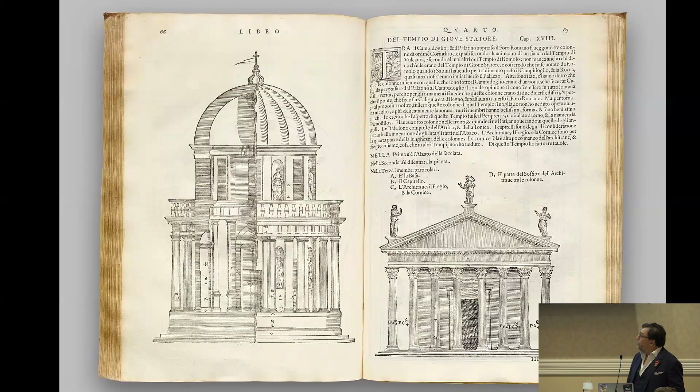But it's worth just remembering that Palladio's Quattro Libri was only one year old when that battle took place. And Michelangelo's magnificent dome of St. Peter's was as yet incomplete when that enormous military catastrophe took place.

So in a sense, do we look at Palladio and Michelangelo and look for their reflections of the cataclysmic civil strife that was going on in the Italian Renaissance? I don't think we do, really. I think their pursuit of beauty and their pursuit of the nobility and universality of the classical tradition continued despite the civil chaos and military strife that existed in this period.

Other significant moments in the past, such as the French Revolution, I think everybody knows what kind of situation that was, and it still generated some magnificent buildings after that revolution, despite the enormous loss and terror and chaos of the events. And in Russia, churches were destroyed after the Russian Revolution in 1917, and Bolshevik soldiers would just ravage the churches and take everything away.

So there's just a lot of chaos and uncertainty and confusion in history, but I don't think architecture is necessarily there to reflect on that.

Even today we see these cataclysmic events in the world where large groups of people are made homeless by conflict, and entire towns are just routinely destroyed. And also churches in Syria are now famously being destroyed one after the other. So there's a lot of chaos and confusion and uncertainty in the world, but where does that really leave us?

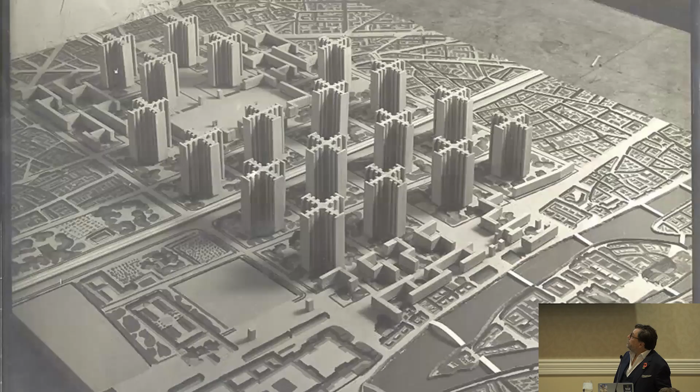But that's not new. All of this began much earlier, more than 100 years ago. And this was Corbusier's plan for the destruction of the center of Paris and the rebuilding of these enormous towers. That was a very serious plan of Le Corbusier.

So the historic environment's always been under threat. And you can see the amount of effort Corbusier put into these drawings. This wasn't just a Sunday afternoon sketch. This was a proposition to change the world.

And after the war, of course, in England, after the Blitz, much of London was destroyed. And you can see the new tower blocks of the future under construction. And this defined our urban environment for very many years to come, and it still does.

St. Paul's Cathedral stood out famously amongst the ruins of London during the aerial bombardment of 1941, and one could say that perhaps it had a worse effect after the war, when the modernist rebuilding of Paternoster Square took on a kind of Corbusian dimension. Thankfully, that's now gone, and everybody knows what it's been replaced by, which is great.

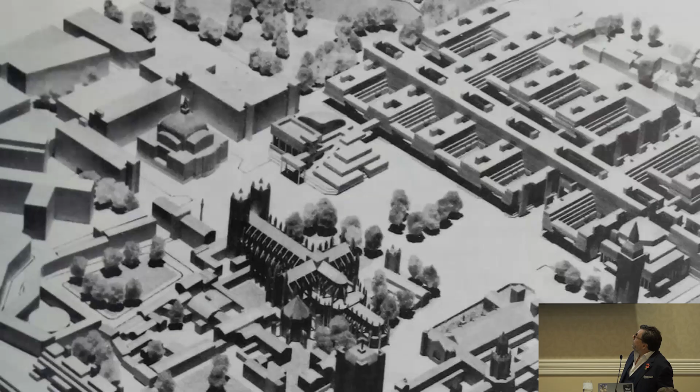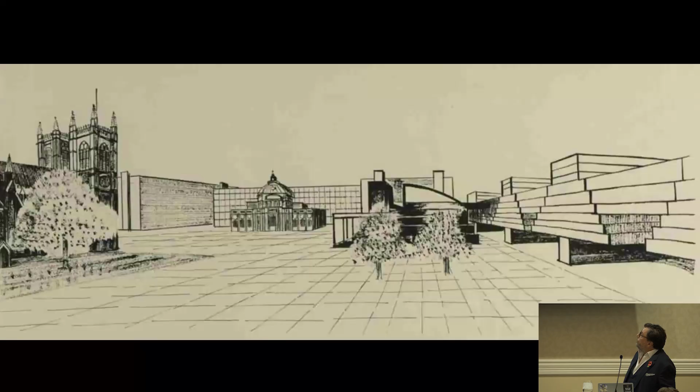So little by little, some of these things are being called into question. This is Parliament Square, and the building on the right is a monstrous project by a very well-known architect at the time to destroy most of the Westminster quarter around Whitehall, and rebuild it with this, leaving the great ancient cathedral or the Abbey Church of St. Peter on the left there, floating in a gridded space with no context left at all. Thankfully, that didn't happen, and we're still left with this great route through Parliament, Westminster Abbey, and Whitehall. So thankfully, that project didn't go ahead.

But if you look up the transcripts of the discussions in Parliament at the time, the Minister of Public Buildings and Works thanked Professor Leslie Martin and Professor Buchanan for their imaginative proposals. And reading, every word that's uttered in Parliament for the last hundreds of years is actually fully annotated in Hansard, and I think some of the debates are highly rewarding to review. It's a great archive for finding out the discussions about the battles between the potential futures of London after the Second World War.

And just in case we all thought this was just an anomaly, this is Le Corbusier visiting the School of Architecture in Cambridge with later Sir Leslie Martin, knighted for his contribution to architecture in the few years before that project.

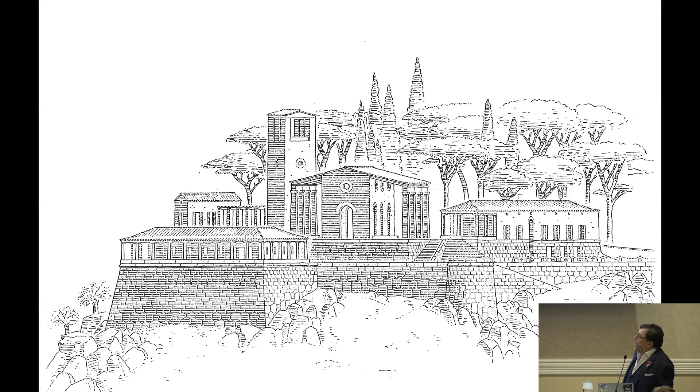I worked with him for a number of years, and we worked on this little villa in Corfu, and it's just a kind of refreshing thing to think about as a compositional device compared to all this worldly madness that we see around us all of the time. The genius of this composition is spectacular.

One could spend a whole lifetime studying it. It's a miraculous project, and I think these drawings are in the university archives, and I hope that there'll be an exhibition on Krier's work at some point, taking out some of this wonderful work, and perhaps Stefanos will invite me to assist with the curation of such an exhibition.

And of course, we know that Leon Krier's legacy is all about regaining that lost world of the beauty in architecture and having a consistency of skyline and a consistency of approach to architecture, which we're all in this room all struggling together towards achieving in our own different ways.

But Leon's world was based on a number of fundamental truths and beliefs in the world of beauty and what it constituted. And the idea that things had their proportional sensibility and that it was a part of the way that you make beauty was very much central to his philosophy, and it certainly is to mine.

All of those traditional things that we regard as beautiful are no longer embarrassing to a new, younger world where we are unapologetically pursuing that exquisite world of beauty that has been lost.

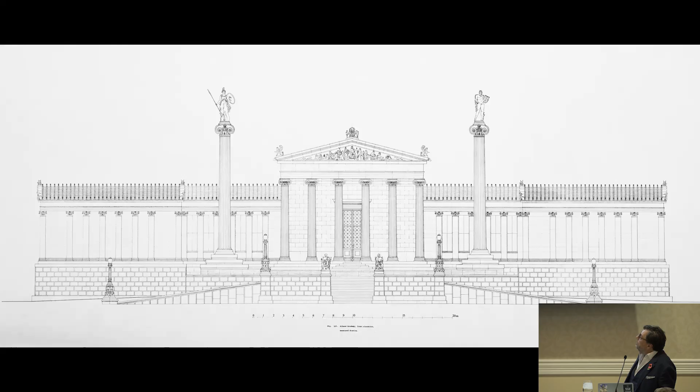That's one of the products of my 6 months measuring the Academy, and getting to grips with its beautiful detailing was a formative moment in my architectural education.

And how things are made. That exercise in Athens brought me very close to really looking, when you crawl around the roof space of buildings and see the slightly unfinished surfaces, you can see where people left their mark as if it was yesterday. And that was true. I had the happy experience of being able to clamber onto the top of the Parthenon and look at the unfinished bits that nobody ever saw. That fascinated me. You could actually begin to see how the building was made and reverse engineer how its whole construction took place. So measuring buildings is full of delightful surprises that lead you into delightful avenues of consideration.

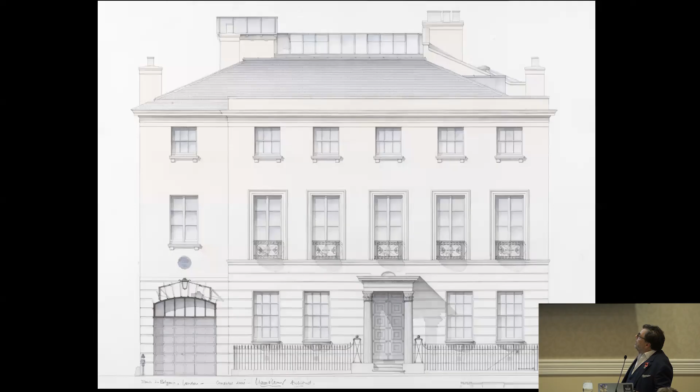And in this house that I designed in London, with its Tower of the Winds order, was an exercise in very much along the same lines. Everything was drawn by hand, full size. We needed over 1,000 drawings for that building, as many Notre Dame graduates who've been in the office while this was happening will attest to.

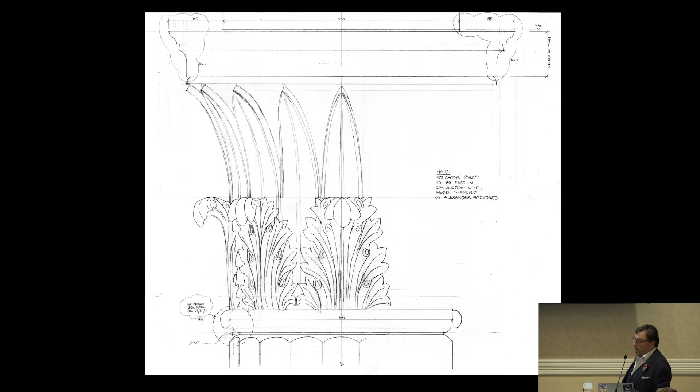So drawing it and supervising the construction, that's another aspect of something that deeply fascinates me, and I think it's a whole strand of expertise that architects have lost, and I think they need to regain that territory with both hands and with considerable gusto, because the joy of actually making something that you've designed and seeing it done with a certain kind of authenticity and physical power, with a lot of craft skill involved in the production of it all, is, in my view, an essential component of designing and building anything.

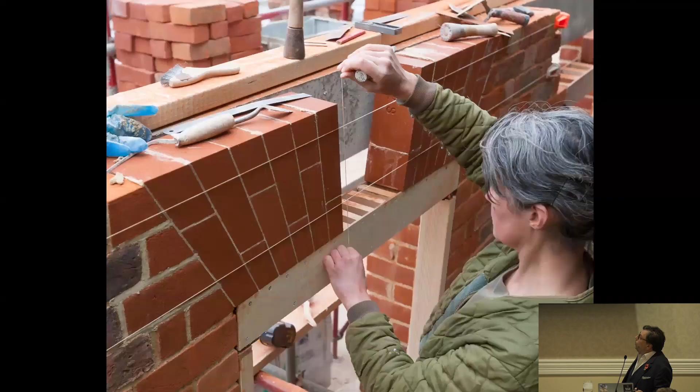So it is still possible to just take really good materials and do beautiful things with them, and not have too many people involved in the process other than you and the craftspeople making it, and it's a highly rewarding thing. We've been photographing the construction of all our buildings as I slowly realized that nobody else is really doing this. So we're making a record of what we've done and how we've built everything that we've designed.

Just so we can prove to the world that it really is the way we said it was, because people mostly think, yeah, that's just what you're saying, but really? But then we have a lot of records showing exactly how things were made, and it's very important to do that. This is our Armed Forces Memorial project, finished in 2007 up in Staffordshire, and we built this hill and put a monument on the top of it, and it's in a very low location where 3 rivers meet, and in the winters it floods. So despite significant opposition from the environmental agency that we were building in a flood zone, it was our purpose to do that.

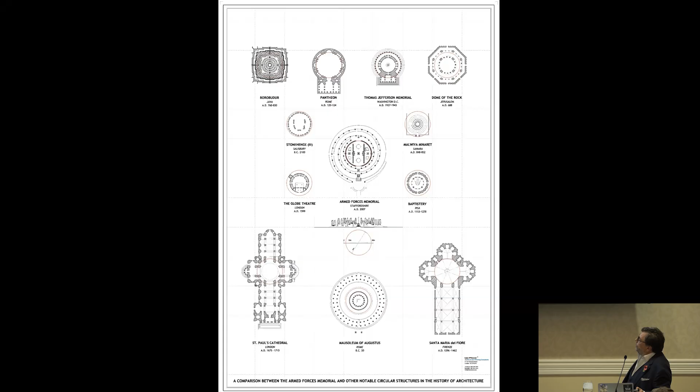One of the references to that is Stonehenge, which is a magnificent building and virtually the same size. Having looked at some of those buildings like Stonehenge and compared them to other circular structures, we started looking at the Dome of the Rock, Jefferson's Memorial, the Pantheon, and all sorts of other buildings. The Dome of Santa Maria del Fiore in Florence, Wren's Dome, everything, or virtually everything, is the same as the Pantheon. So almost all circular structures in the history of architecture which are sacred in nature are almost the same size, which is a remarkable discovery. So how could we do anything else but 43 meters?

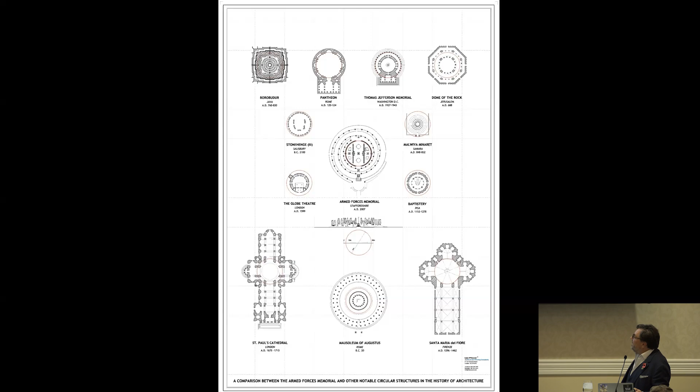It was also an opportunity, knowing that these rivers would flood from time to time, to create our own version of this great Böcklin painting, The Isle of the Dead. So when the rivers do flood and it floats, it is truly an Isle of the Dead. It has about 17,000 names of members of the armed forces.

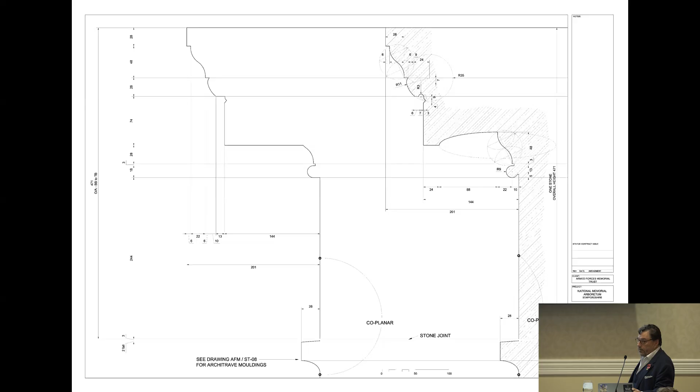Again, this is an example of how we draw full-size drawings for construction, to make sure absolutely everything we intend to happen happens. If you don't do this, it will not be what you've designed—it will be something else that somebody else decided. As an architect, I think you have a duty to do at least this amount of information. It looks like overkill to some people, but that guarantees you get exactly what you want. The character and profile of the stone, cut in accordance with your design intentions, is only going to happen if you do this. If you don't, it will be something you dislike, because it won't reflect your design thoughts.

In the middle of it we have this slot with a door, a stone door cut ajar. The idea is that the sun shines through at 11 o'clock on the 11th of November every year and touches the wreath at the center of the memorial—the moment the guns fell silent at the end of the First World War, which everywhere in the United States, Canada, Britain, everywhere in the West, commemorates Armistice Day. That's the architectural manifestation of that, and it's cut in the wall so that it'll be accurate for 1,000 years.

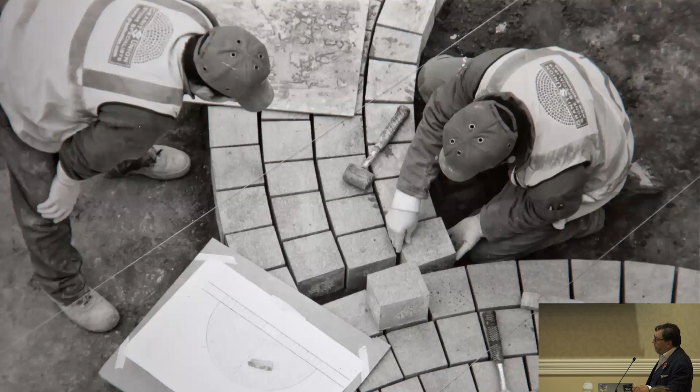Again, we have a big photographic archive of how all these things were done—the transformation from intention to drawing, from drawing to construction, and construction to finished product, all recorded in our archive. Our monument here, a few hundred yards away, commemorates the 56,000 volunteers who fought in the air war over Europe in the Second World War.

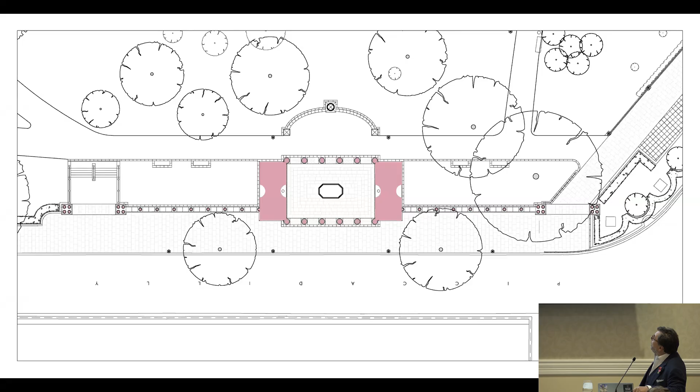It's an urban proposition that sits at the edge of the park and exists at many levels. It has gates to the park on the far left and far right, and a gate through into the park in the middle. It's all about open connections between pathways that didn't exist before this monument. All of the landscaping and the path connections at this end of the park are part of this design—it isn't just the monument, it's everything around it, including lots of new tree planting.

On one level it operates as a gate. When you see it from the street, it's visible in many different ways as you approach it, and it frames wonderful views into this park from one of the busiest streets in London. That's a very nice contextual dichotomy to play with.

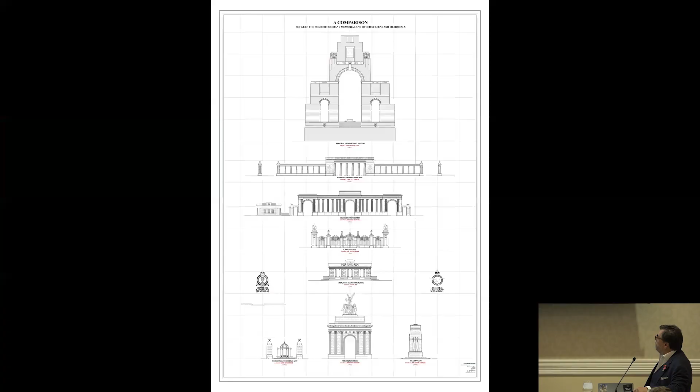Looking back towards Wellington's house, Apsley House, and one of the busiest roundabouts in Europe, it still forms a nice frame to the edge of the park. Here we compared it to the arch at Thiepval above, and Decimus Burton's other works around.

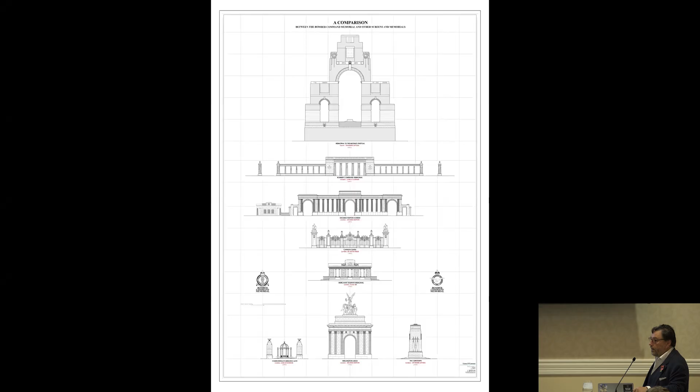Again, this was a design tool to ensure that the scale of what we were doing made some sense. It still has its own architectural authority, dimensions and meaning, but it also has a sense of being part of a family of other monuments, fitting in with the general visual framework established for over 200 years in this part of London.

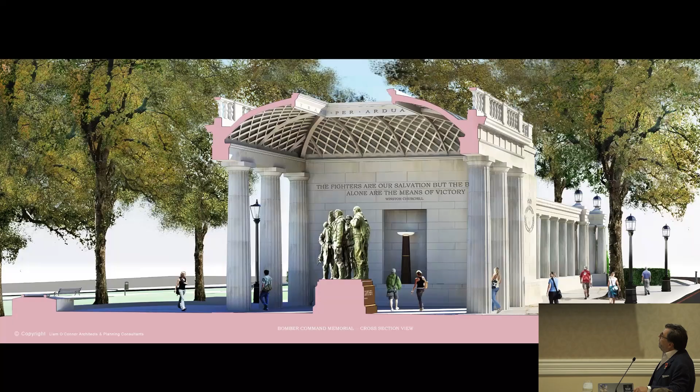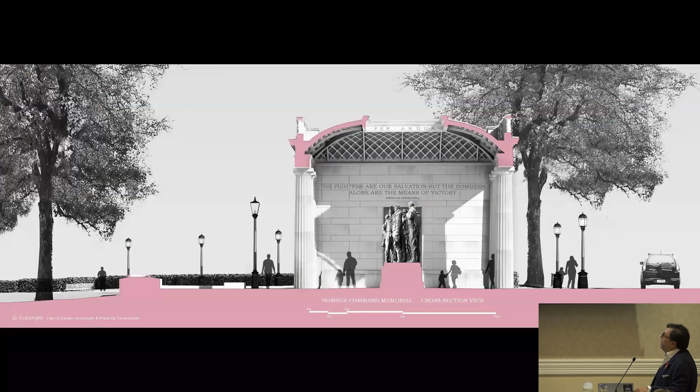What's important about this monument too, I think, is that it has this open structural stainless steel roof sitting on this stonework, which in a sense doesn't seem to be a classical idea, but there are many great examples in the 19th century, particularly in France, where large steel roofs sat on stone bases - the Petit Palais, the Grand Palais, the Bibliothèque Sainte-Geneviève, three magnificent examples. We wanted to follow a little bit that tradition of a singular metal roof on a stone substructure.

I'll show you some photographs of that in a moment. But these are photographs showing these great drums of stone being laid into position. It's really a fun thing to see skilled stonemasons at work, and watching all this incredible skill being deployed in the service of what will become architecture is a very joyful part of being an architect, and I would strongly advise everybody to pursue the same route.

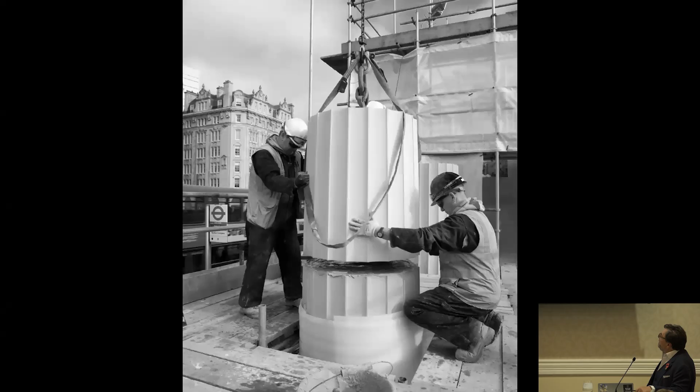Really, it's a wonderful thing, feeling these 1-ton blocks of stone being lowered into position. We had a fantastic sculptor working on this, making an aircrew of 7 people that sat in the middle of the monument - absolutely wonderful work in bronze by Philip Jackson. Quite a feat of bronze, there aren't many large-scale groups of bronze.

Rodin did his famous Burghers of Calais, a copy of which is in London, and this is our reflection a little bit on that - the basis of a large group of people on the plinth. It's fun to walk past it and see many different constituents enjoying the spectacle, and there is a lot to look at in there.

But the roof is very interesting. We were given some aluminium from the Canadian Bomber Command Museum saying, this is a piece of an aircraft that was shot down in 1944 on its way back from a mission - can you do anything with it? And I thought, okay, let's think about this.

So we had this aluminium from this Halifax aircraft flown by the Royal Canadian Air Force to Scotland. It was then taken on a boat from Grimsby to Norway, re-smelted down as sheets, brought back and assembled by this wonderful metalwork team in England and riveted together. So it's really the aluminium from that aircraft that we put back.

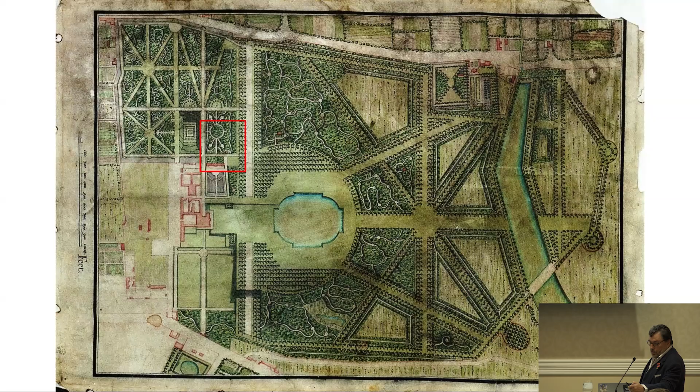On another note, briefly, inside the red box, there's the red building, the Orangery at Kensington Palace. This is a famous landscape plan by Charles Bridgeman, one of the preeminent landscape designers of the 18th century. And it's the unfinished bit at the back of the Orangery which was the focus of our commission for Historic Royal Palaces, who wanted to extend the Orangery.

The bit at the back was full of ad hoc temporary buildings performing vital functions for the functioning of the restaurant, the Orangery as it now is as a restaurant, and all of that was to be consolidated, plus some historic textile conservation space, in a new building to the rear.

The palace is a very, very low-key building, very unusually low-key for an 18th century royal palace, and it's had many sovereigns living there over many generations, but it's a very unusually low-key building. And so the Orangery is rather the most important piece of architecture in the entire palace ensemble.

Before we started work on that design, there were no drawings of the Orangery, so we had to measure it ourselves, and that was very interesting because I'd been doing that for so long in other buildings. It was a treat to actually get to measure a building that didn't really have an attribution. All of the historic books say that it was Wren with the association of Vanbrugh, or Vanbrugh with Wren signing off the accounts. And it just looked to me as if it was Hawksmoor, and no one's really given that attribution. I think we will formalize that in a book soon, partly due to how we formed that attribution. It started really with looking at the other works of Vanbrugh, Wren and Hawksmoor.

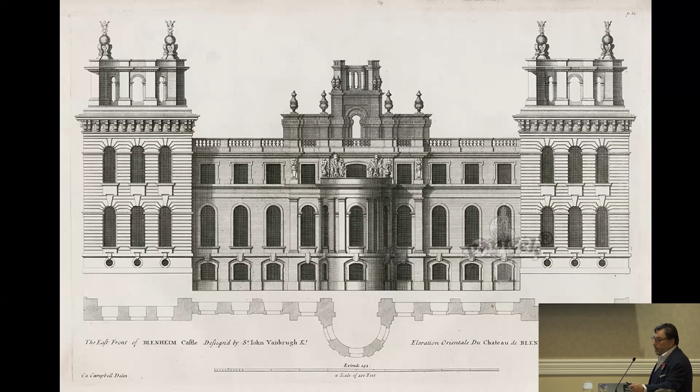This facade is really where this entire facade is one room. It's the library. And inside it's this, with the little tower bits separately existing at the ends. So we measured the Blenheim Library.

We also went to All Souls College in Oxford, where Hawksmoor is fully attributed as the designer for the Codrington Library, which is an exquisite building. It's Gothic on the outside in his typical manner to keep with the medieval traditions of architecture in Oxford, and a magnificent classical interior within it, and hard to reconcile these Baroque arcuated windows with the Gothic external windows, but it's a feat of architecture in itself. It's a magnificent long room, really an extraordinary space to be in, and a very interesting piece of architecture.

So here you see the Orangery. This is a photo montage. We reconstructed the lost gardens that were part of the Bridgeman plan in order to provide some kind of idea about how we might create a facade to the new building, and reflect that long-term relationship with the lost garden, in the hope that we could be a force for good in getting that reconstructed at some point in the future. So the layout of our building facade is in sync with that lost garden.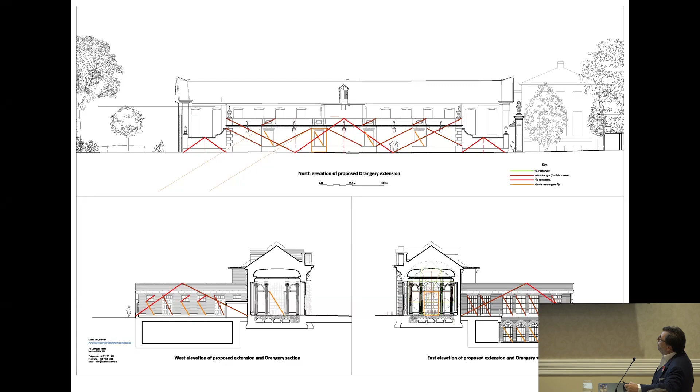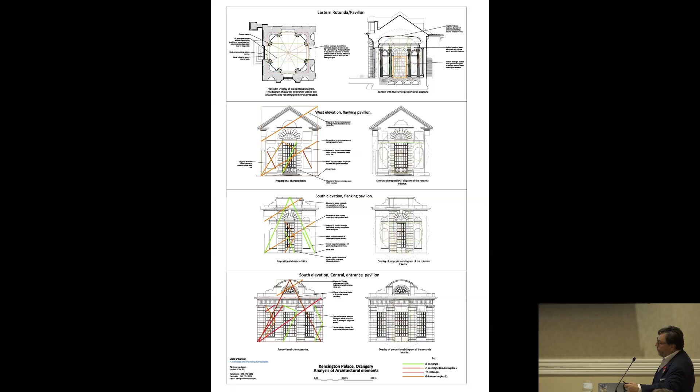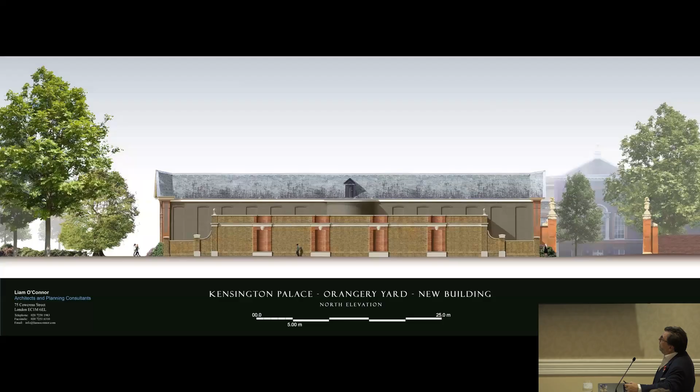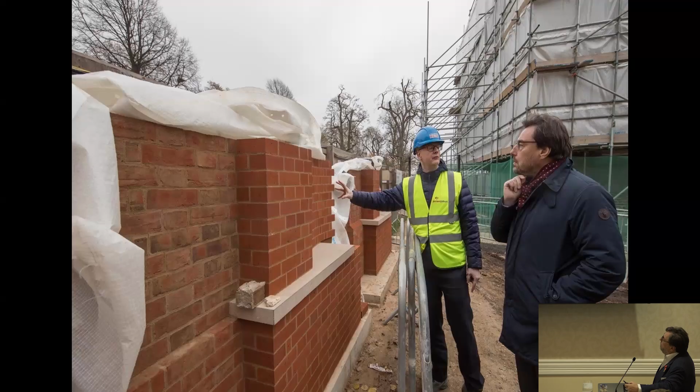That was generated from our proportional analysis of the main buildings of Hawksmoor's front, and that translated into architectural construction drawings in the way that we do in our practice, which generated this building. These were the designs submitted for the planning permits, together with some photo montage perspectives. The building is now finished, but some great craft traditions were deployed in the completion of the facade, and that's the finished building, in context of the original building, with the palace in the background.

Just back to monuments briefly, I was always impressed by the argument everybody has about Maya Lin's war memorial in Washington, for the Vietnam War. For me, every time I walk down that ramp, I don't see it as a classical building, but I see it as a perfect rendition of Book 6 of the Aeneid, where Aeneas describes his descent into the underworld to meet the souls of the soldiers who fought with him at the siege of Troy. When I walk down that wall, I'm in the Aeneid, and I think that's an incredible relationship that people have kind of not really taken.

I think if you walk down that ramp and read it at the same time, you suddenly see this in a very different way than just a giant slash through the landscape. So there's more to this monument, I would suggest, than people have hitherto suggested.

But the great monuments in DC are a vision of perfection in many ways, and this was of great interest to me, partly because you can walk through it in the middle of the night, unfettered. That is, I think, a tremendous demonstration of freedom in modern society, that you can walk into and partake in the civic structures of your city. That's absolutely remarkable, and I don't know anywhere else that you can do that in the world.

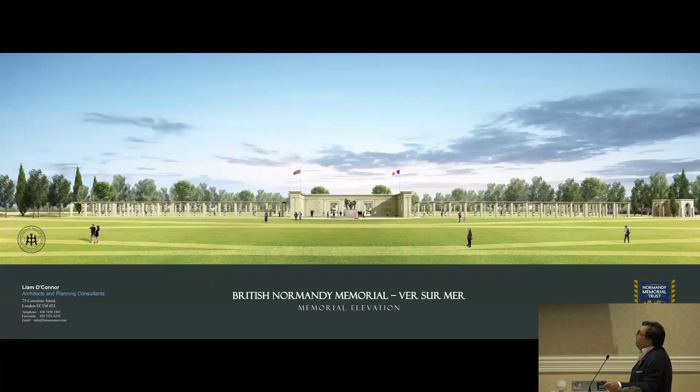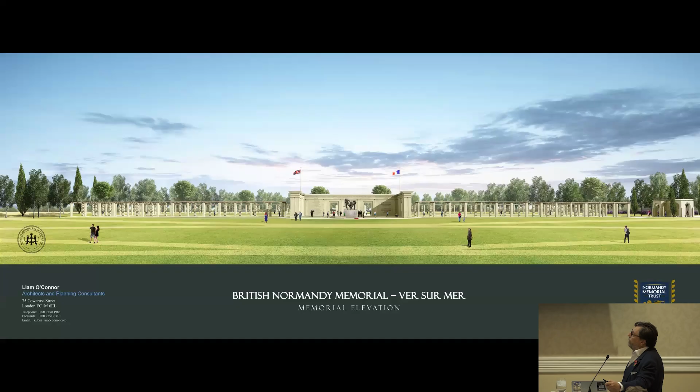In Normandy, we did something slightly similar. We buried our monument in the landscape. There are no gates or entryways to it, so you can simply find it as you cross the landscape. Although when you get there and overlook the sea, you feel a very spectacular relationship of building to context.

But when we started the project, again, without any clear brief really from anybody, we spent about a year just recording the site in a series of paintings so that we could all just imbibe the sensibility of the space before we touched it. In a sense, the silence and simplicity of this painting is one aspect of it.

The other thing is that this was a battlefield on the 6th of June, 1944, and 179,000 men came ashore on 5 beaches along here. This is one of the 5, and a battle raged for many weeks. What we were to build there would commemorate the loss of life of 22,500 of those men.

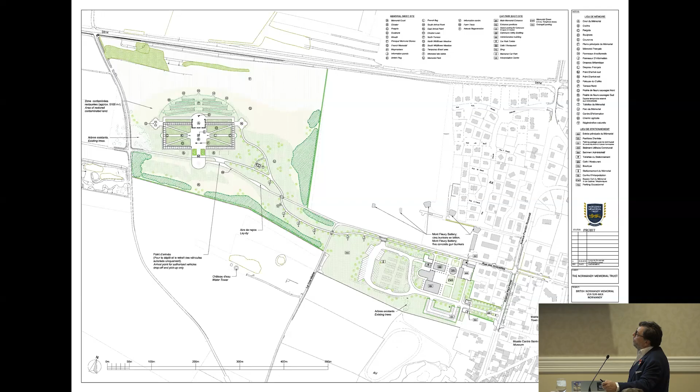Our master plan for the 60 acres begins with an entry into the site from the local town, with car parking, toilets, shops and everything else close by. Then it's a long walk with 6 stone steles telling you the history of what happened in the Battle of Normandy, so that by the time you get to the memorial, there's no signage, no information, just stone, bronze, the sea and the sky, and the names of 22,000 men. There's no need for any further information.

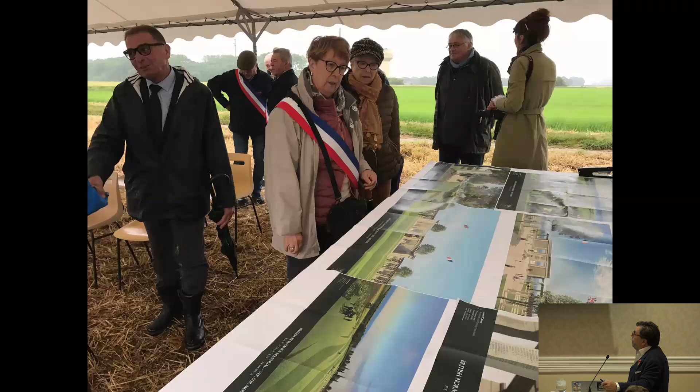It took 2 years with a lot of direct negotiation with everybody involved, including the 15 farmers who had to sell us the land before we could even think about building anything here. It was a very long journey at many levels. That's another great thing about being an architect: when you're involved early in a scheme, you can have a lot of influence over things you would normally not have any influence over at all. Choosing the site was part of our job, and I think it was definitely the right place to put it.

It's been great to face all the veterans and the men who lost colleagues on that beach that day, coming to see the memorial and telling me what they think of what happened in their life and how they feel now. That's been a very rewarding part of the process.

I was happy to meet an American veteran who's still living in Normandy. He's 101, Charles Norman Shay, an absolutely wonderful character. I've been trying to meet these veterans just to talk to them about their experiences, and I did that from the beginning, and I'm still doing it long after it's finished.

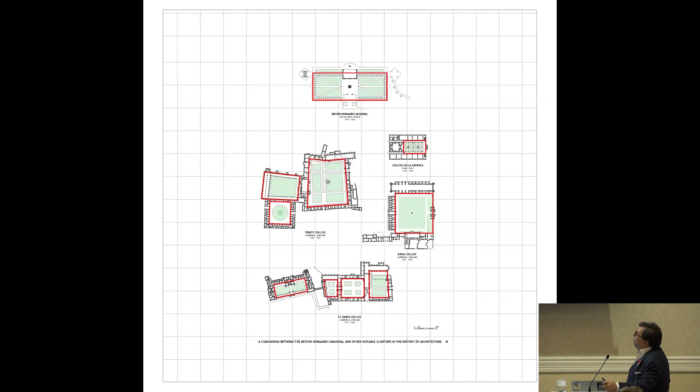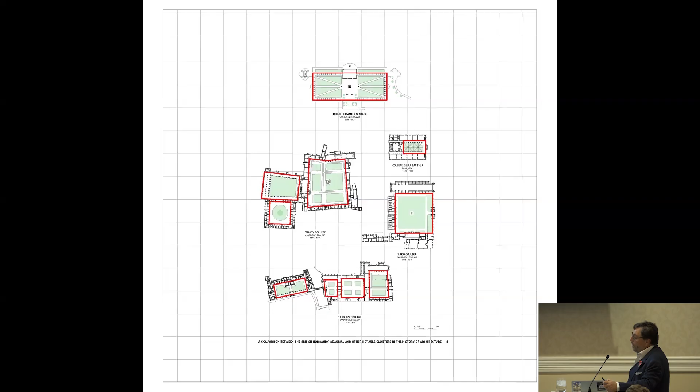We did quite a detailed analysis of all the significant courtyard spaces in history, of which there are an enormous number, but we made our own choices just to understand the scale of what we were doing, to see how they were - the Forum at Pompeii, et cetera. We classified buildings from antiquity, and looked at medieval college buildings to understand how those courtyards worked. It was all to help ensure the scale of what we finally produced had a familiarity with buildings people would certainly know about or have visited. That juxtaposition of something new and something familiar, I think, is an important thing for an architect to do when looking at precedent.

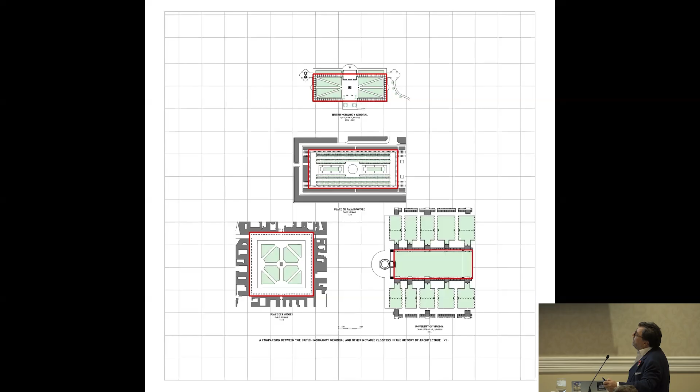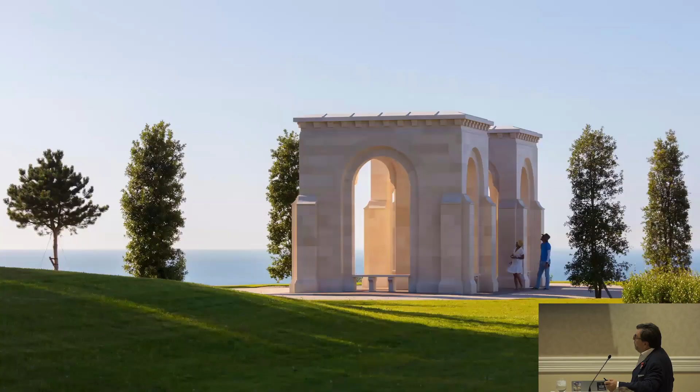The other important thing about this memorial is this memorial, which is dedicated to the French civilians who lost their lives in the battle, and almost as many individual people died finding themselves suddenly in the middle of a battlefield between June and August 1944. So we've commemorated them with their own memorial.

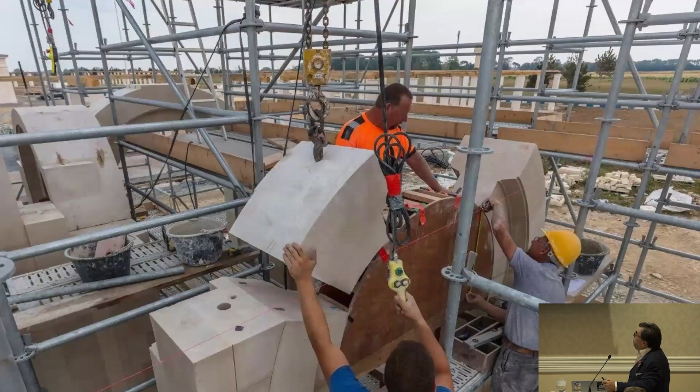At the heart of it is a wonderful block of stone with a wreath and shield on it, and that wreath and shield is 1.5 meters in diameter. So not the shield of a man in battle, but a shield of an army laid to rest with its broken elements as a symbol of the end of war, with a wonderful text and wreath carved by a wonderful woman sculptor who did a fantastic job with this, and she was very happy to work with ideas of antiquity about how shields looked and how wreaths looked.

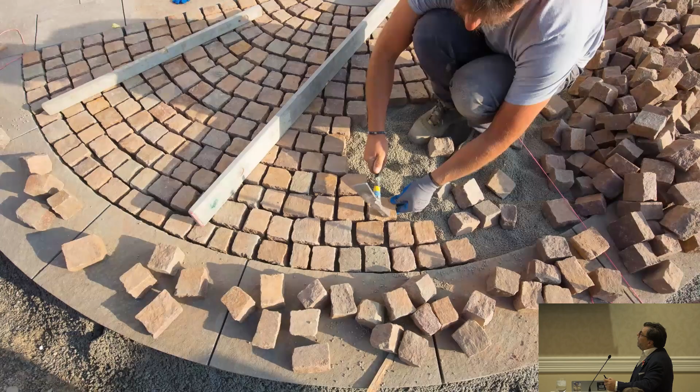So we were able to bring some of those kind of fresh ideas of antiquity to a new thing, and avoid the kind of whole 20th century idea of what wreaths look like. So we were able to rethink that afresh from start to finish. And the whole thing is paved in a wonderful way. So the paving is critical to it. Just as if you visit any great historic space, the paving is always important, and it's a thing we all remember. And having that crafted to the same level of specification and quality as the superstructure is a really important part of this particular project.

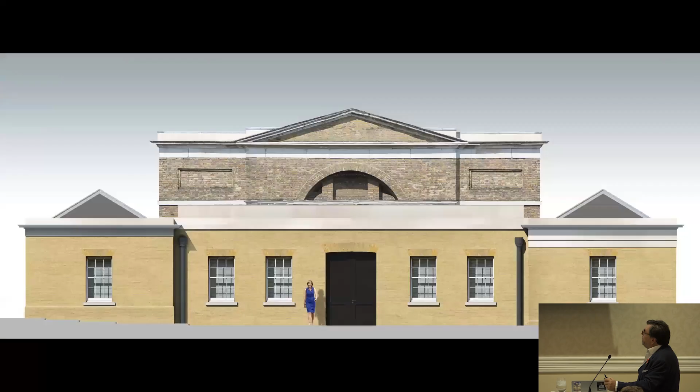In closing, this is an 18th century magazine in Hyde Park in London. The wing on the right is new, which was designed by us. The rest of it's been there since the 18th century. And that little white thing peeking over the edge is the other addition, which we didn't design, but Zaha Hadid did. And it was a wonderful collaboration, in fact.

So Leon's legacy with her never ended and carried through her whole life. So despite what you think of her architecture, she had a very soft spot in her heart for Leon and the shared experiences that she had, which I had too.